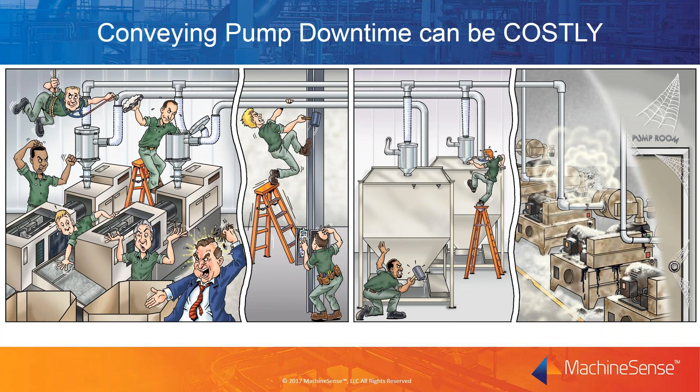This is a lighthearted look at a serious issue. Inadequate or inconsistent conveying performance can often lead to scenes like this, and the results are costly. First and foremost is unplanned and often hidden downtime in the form of starved machines, missed deliveries, lost profits, and angry bosses. It also leads to wasted time and lost productivity chasing conveying problems that can be difficult to diagnose and understand, but with help are very preventable.

At the heart of the conveying system is often a positive displacement pump. Often this vital piece of equipment is forgotten until it fails. Once the blower has failed, similar chaos ensues as maintenance personnel have to scramble to get the system back online. Today, we'll look at frequent causes of premature blower damage and some methods to identify and correct these conditions so you can prevent costly pump failures and unplanned downtime.

Jim, you want to start us off on this presentation? Sure, John, thanks. First, let's put a perspective on the cost of failure as it relates to vacuum conveying pump failure. The top graphic illustrates a typical positive displacement pump replacement unit. The replacement cost for a PD pump can range from maybe $2,000 up to about $5,000 or more, depending on the blower model. These costs are typical for pumps commonly used for vacuum conveying pellets and regrind through a plastics plant using tubes that are typically 2 to 4 inches in diameter.

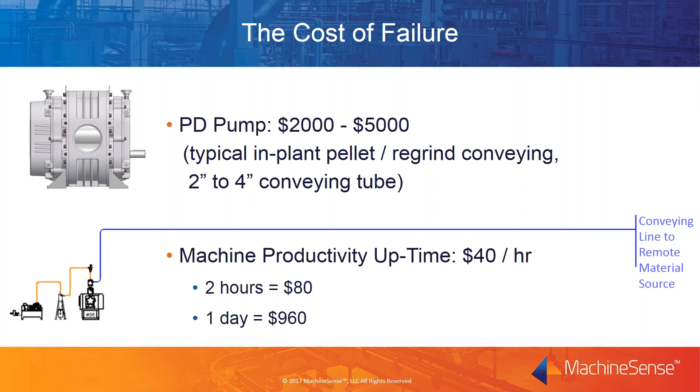But most vacuum conveying pumps are supplying resin to more than a single machine. It's not uncommon for a vacuum pump to service from 5 to 10 machines. In some cases, depending on the application, a pump can service 15 or more machines. With multiple machines relying on a single pump to supply resin, the math related to the cost of failure is multiplied and can change dramatically. The bottom graphic now shows a vacuum pump assembly pulling plastic resin from a number of remote material sources to 10 injection molding machines.

Multiplying the numbers in our example, if the replacement pump is in stock and repair is 2 hours, the machine downtime across the affected production cell now adds up to $800 plus the cost of the pump. If the pump's not in stock and it takes a day to repair, machine downtime now adds nearly $10,000 to the replacement pump cost. The net cost of failure across the 10 machines now ranges from about $3,000 all the way up to about $15,000 on the high side.

Customer impacts can also be significant. Machine downtime can lead to late shipments and potential penalties associated with missed contract commitments. Your reputation as a reliable supplier can be put at risk, which can also jeopardize future business. These are steep prices to pay for failure of a single pump. That's why they illustrate that a vacuum pump is really considered the heart of your resin supply system.

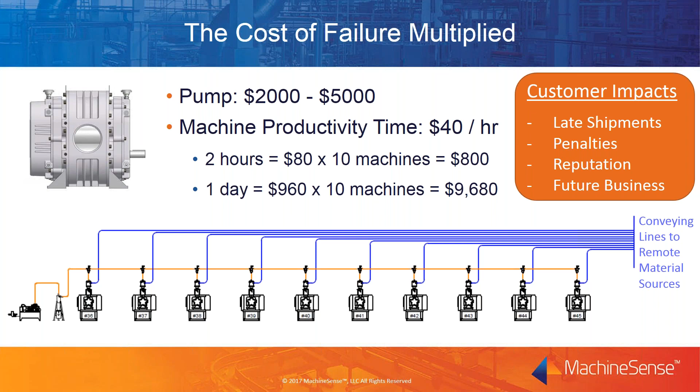While it's not often thought of in these terms, in reality, vacuum conveying of resin to process machines really can be considered a valuable plant-wide utility for plastics processors. And what do we mean by that? Well, as we just saw in the example, and like most other utilities in your facility, an interruption in resin flow caused by pump downtime often affects multiple processes. So from that perspective, resin flow is as critical to plastics processors as water, power, and compressed air.

Like power, arguably the most common utility, resin conveying principles are not necessarily intuitive, and symptoms are frequently misunderstood or even ignored. Resin conveying is more sensitive to system installation and setup than other utilities and requires more frequent maintenance. Redundancy is not widely implemented as a standard practice, so proper operation and maintenance is crucial to preventing downtime. As we illustrated in our example, resin supply interruption can quickly become costly when multiplied across production machines.

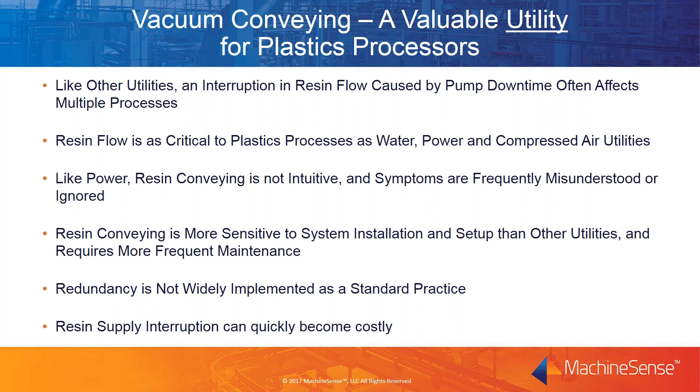Before we discuss common problems and the causes associated with conveying systems and vacuum pumps, it'll be helpful to understand some basic terminology. At the center of the graphic is a complete PD pump assembly. As the graphic illustrates below, air enters in through the top inlet on the top surface of the blower. You have two counter-rotating lobes in the center, and they take pockets of air that enters through that inlet and push them around the perimeter and push them through the outlet. Because the clearances are very, very tight, PD pumps are very efficient and capable of producing high vacuums. Coupled with the fact that these blowers are cost-effective compared to other technologies, they're commonly used and considered the workhorse in our industry.

The graphic to the left shows the gear side or the gear end of the pump. Hidden behind the gears are ball bearings. Both types of components rely on proper lubrication for a proper operating life. The other sump on the right side of the graphic shows the drive end. Once again, you have bearings that rely on proper lubrication, and the slinger fingers installed to circulate the oil. In this case, the drive shaft often sees heavy side loads created by the belt that typically drives the rotating pump.

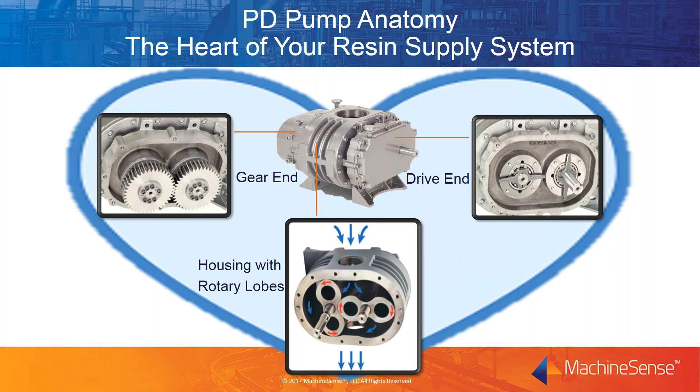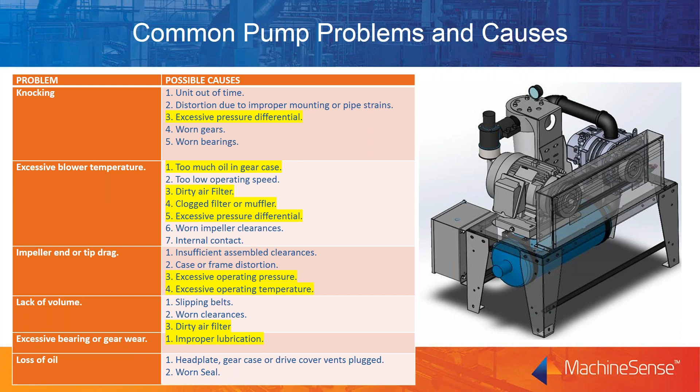Okay, so now that we know a bit about pump anatomy, we'll move ahead to common pump problems and their causes. This table summarizes common problems identified in a typical pump manufacturer's operation and maintenance manual. Some problems you may have observed in your own plant, like knocking or the sound of dragging inside of the pump, or you've seen loss of oil through seal leaks. These are tangible issues that you can see and you can hear. Other problems aren't so easy to identify, like excess temperature, lack of air volume, and excessive bearing or gear wear. Whether you can see these problems or whether they're invisible, the causes for these share a lot in common.

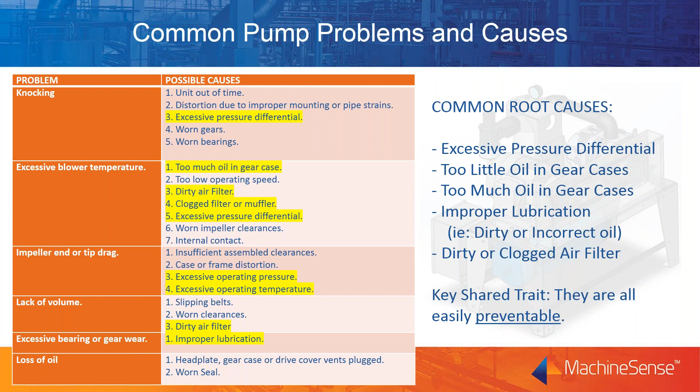These preventable root causes also share a common theme across the majority of industrial machinery. Surveys have shown over 50% of industrial breakdowns are due to improper lubrication. This includes under-lubrication, over-lubrication, and wrong lubrication, which means either the incorrect type or the lubrication failed. Lubrication and air filter issues, when combined, account for anywhere from 60 to 75% of machinery maintenance and repair for general industry. Once again, these problems are very preventable. We'll take a closer look at them in the slides that follow.

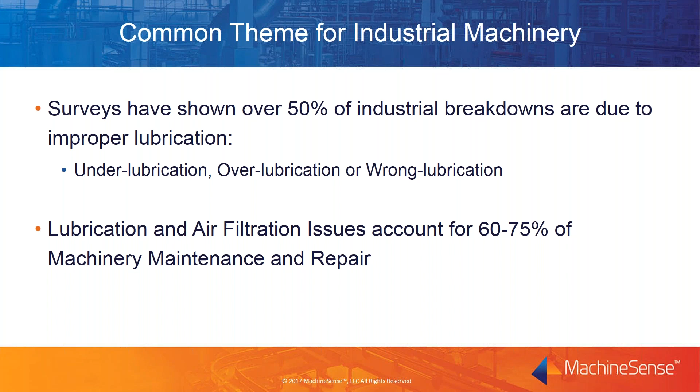Our initial focus will be on the lubrication issues. It may sound overly basic, but the first step is understanding the pump setup and proper lubrication.

The breathers are located on the top surface near the back of the photo. As the blower heats up, the breather allows the expanding air to vent rather than stressing seals. The fill ports are located on the top near the front of the blower in the photo. The left side is the drive side, the right side is the gear side. Each has a different capacity requirement for filling, so if you're pre-measuring the oil, be sure to verify both amounts.

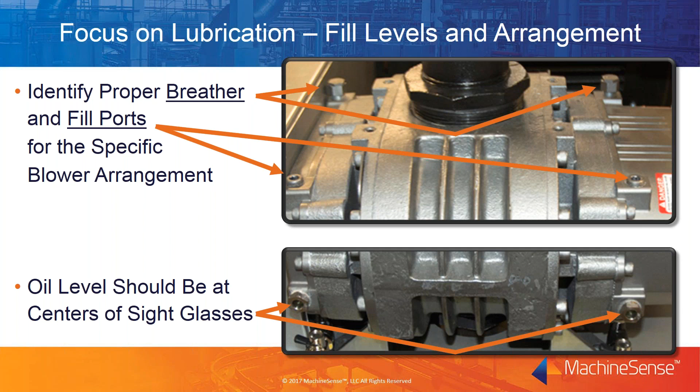Most pumps have oil sight glasses shown in the bottom photo. They allow you to fill the pump just by sight until the oil level reaches the center of that glass. When filling, it can take some time for the oil to find its level, so always pause briefly before checking the sight glass. Note the levels can only be checked when the pump is not operating.

The most obvious and often quickest lubrication issue to do damage is an underfilled oil situation. If the pump is started and run when the oil is low, it will generate heat and the pump will experience metal wear. This eventually leads to additional complications with metal contaminants. They accelerate wear and they compromise oil seals.

The damage to the gears can happen very, very quickly if the level is dangerously low. The gears wear and begin to fail, and you'll begin to hear a ticking sound or a knocking sound. That indicates the internal rotary lobes are clashing together due to backlash that's begun to affect the timing. End clearances can change, forcing the drive rotor into the end plates.

Underfilled oil will also cause the bearings to begin to fail. As shown in the bottom photo, the ball bearings are exposed and they rely on a consistent supply of oil to maintain the lubrication film that's sufficient to prevent metal-to-metal contact.

It's important to note pumps with damaged gears, bearings, or seals can be rebuilt, but only if the damage is caught early. The key is recognizing the problems before damage is done to the blower housing and to the blower lobes.

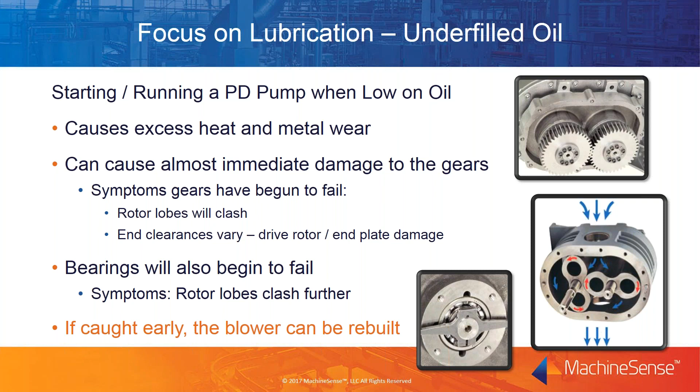A not so obvious lubrication issue, but still capable of doing damage, is an overfilled oil condition. Excessive operating temperature can occur when the pump is started and run with too much oil because the heat can't be dissipated effectively. This causes abnormal stress and wear of gears, bearings, and seals. This can cause surprisingly quick failure in extreme conditions.

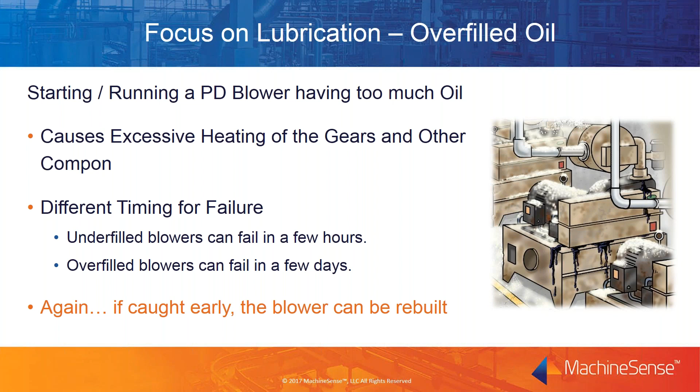A pump manufacturer explained it to me this way. Operating a pump with a near empty oil reservoir can lead to failure within a few hours or even less. But running a pump with a sump that's filled to the top can lead to failure in as little as several days. Once again, if the problems are caught early, before damage occurs to the pump's major components, it can be rebuilt.

The final focus when it comes to lubrication relates to the type and maintenance of oil you use. PD pumps require industrial gear lubricant, not automotive oil. Check the pump manufacturer's recommendations for viscosity, additional requirements or restrictions for additives, seal compatibility requirements, and other enhanced properties that are designed to protect your pump.

Synthetic oil is recommended because of the high heat of compression and temperatures in vacuum conveying. The maintenance interval for your oil depends on the operating temperature. The graph to the right shows synthetic oil operating life decreasing sharply as the pump air exhaust temperature rises above 220 degrees. Depending on application and so forth, PD pumps can operate commonly between 220 and 250 degrees Fahrenheit when fully loaded.

So it's important to understand those operating conditions when you try to evaluate your pump's change cycle. Finally, as with other lubrication issues, and for many of the same reasons, using the wrong oil or oil that's failed from thermal breakdown or contamination will damage gears, bearings, and seals over time.

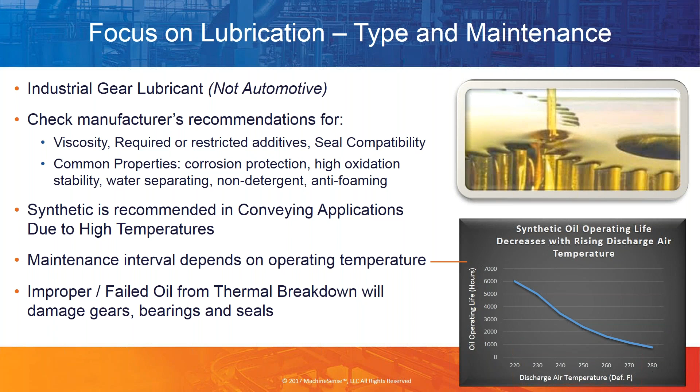So let's change our focus to air filtration, the other very common problem with industrial machinery. Operating a pump with poorly maintained filters can cause excessive operating temperatures. The elevated temperatures result from increased vacuum levels or starving air, which leads to a lack of cooling. The common theme is accelerated oil failure and gear and bearing damage. It can also cause discoloration of the pump exterior paint.

Clogged or damaged filters can lead to fines being pulled through the filter media and into the pump. Inside the pump, the high temperatures will melt the fines and cause them to accumulate on the housing and on the rotary lobes. In extreme cases, the residue can score or gall interior surfaces or even cause the pump to seize. The final problem with poor filter maintenance is reduced and inconsistent conveying performance.

The added vacuum load can reduce the pump's ability to lift and carry material through the line, causing intermittent slugging, line plugs, and reduced throughput. These conveying problems can lead to downtime, missed part quotas, scrap parts, and other hidden costs.

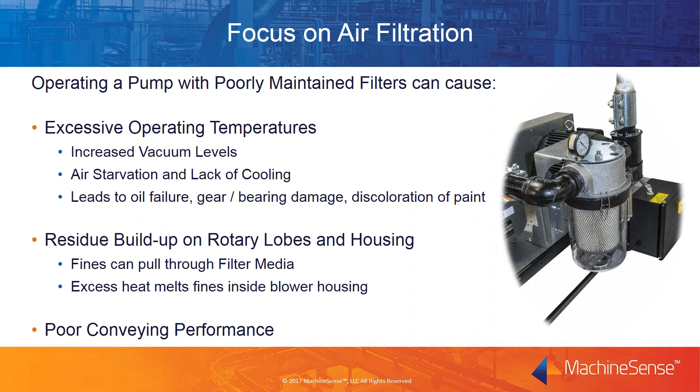Before we finish up with the problems, we're going to focus a little bit on system operating conditions. Operating the system in an over vacuum condition, as we just mentioned, creates unstable conveying conditions and can reduce conveying rates, and that creates excess heat and all of its related problems with the blower. It can also cause rotary lobe damage either by hitting the housing or through interlobe contact.

High ambient or high inlet temperatures also stress the blower. These can be the result of conveying heated materials or from inadequate ventilation near and around the pump.

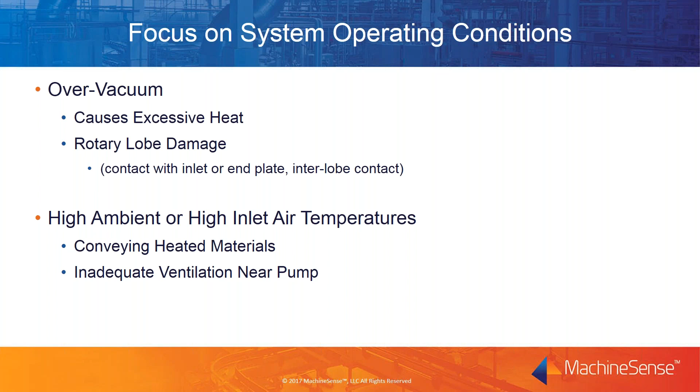It's important to remember that you can prevent over vacuum conditions relatively easily. Always use an adjustable pickup device at your material source. When high vacuum occurs regularly, adjust this pickup to allow more air and less material into the conveying line.

Most receivers include a filter screen to separate material from the conveying air. When problems seem to be intermittent with vacuum, check related receiver screens for plugging.

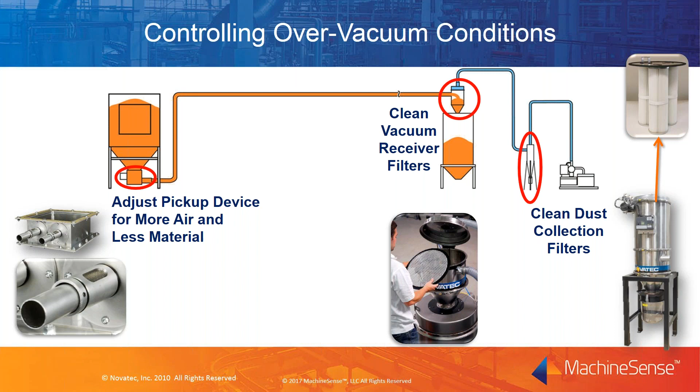Finally, most conveying systems have a central dust collector to separate the majority of the fines before they reach the pump. It's normal for their internal filters to accumulate dust over time, and they will require cleaning to maintain normal conveying system performance.

Okay Jim, it's time to see if we have any questions. And while we're waiting for questions, a couple of things dawned on me.

I know you covered costs related to pump downtime, but it seems to me that there's also a problem with the material that's in process, in the machines waiting to be processed. And when processing stopped, the packaging of the final product also stops. So there are costs from the beginning to the end of the line, not just with the pump.

Yeah, absolutely. So you would kind of consider those to be part of the machine uptime or productivity number. And again, depending on the end product and the process involved, it can range dramatically. We used $48 an hour, but as I said, it can be lower, it can be much higher.

Yeah, and also as far as catching pump damage early, just by hearing a noise, I would think that's pretty difficult due to the noise from other pumps and machinery. So I guess we're going to talk about how to get around that in the future here. Yep, we will, absolutely. Okay, I'm not really seeing any questions yet, so let's move on with the next section of the presentation.

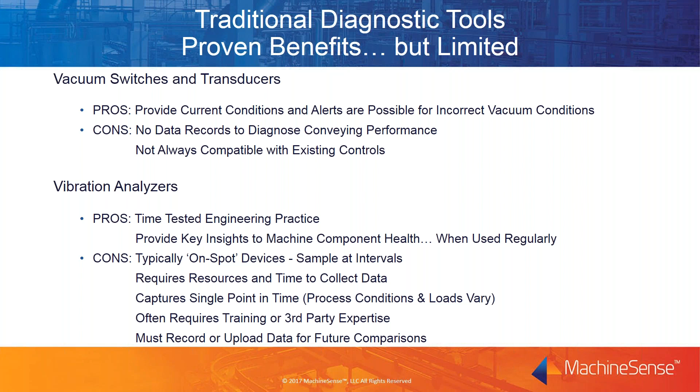Technology is reshaping our ability to monitor and analyze. The industrial Internet of Things has allowed sensor data to become more accessible. Data analytics are becoming more advanced, and historical trends are automatically captured. 24/7 machine monitoring is possible.

It captures varying conditions for improved analytic results. It is easy to access and understand results via app or web page. Automated reporting via email or SMS text messages are included, simplifying information feedback to the people who need it most.

MachineSense Vacuum Pump Analyzer takes advantage of these Internet of Things benefits. This is achieved by continuous machine monitoring and provides prospective feedback and helps with root cause analysis, trending and early detection of component deterioration, even under changing loads. Again, as I mentioned, really critical for helping to understand the equipment through time.

Wireless data hubs included, which allows for wireless connection to your sensors and to your internet. Pump component analyzer is an easy and powerful magnetic mount sensor. It measures vibration and ambient operating conditions. A vacuum sensor with built-in power supply is also included. Therefore, it does not require any maintenance or battery replacement, typical with other types of sensors.

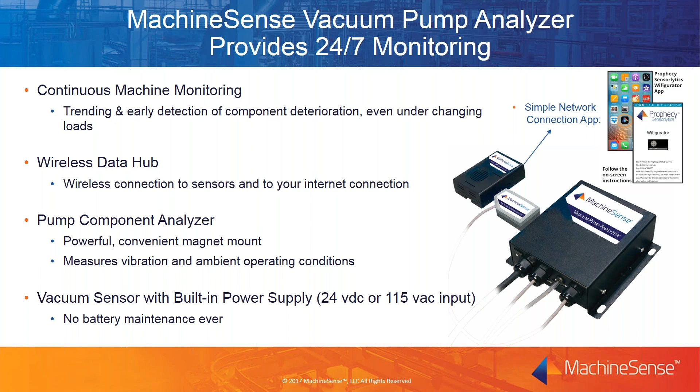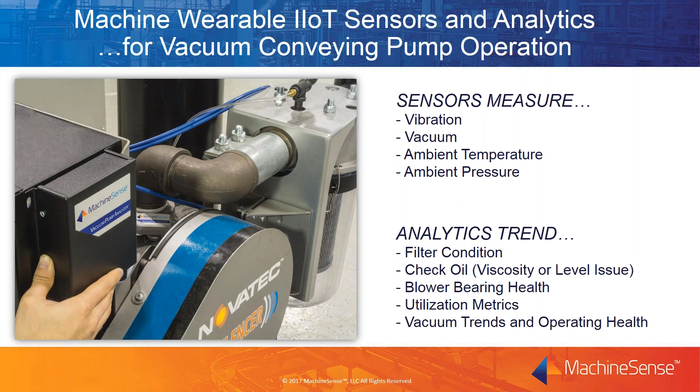These sensors measure temperatures, vibration, vacuum, ambient temperature, and ambient pressures. These are all critical in understanding and getting a true representation of the equipment and its conditions. Combined with analytics, they determine filter condition. We have check oil analytics that tell you if your oil level is low or your viscosity is low. Blower bearing health, vacuum trends, and operating health—all of these trends and metrics help understand proper utilization of your pump in your system.

The sensor, a vacuum pump analyzer, works like this. The sensor data transmits wirelessly to a data hub. It is then sent through a customer-supplied network router to cloud-based servers running powerful analytics software.

This is the Crystal Ball software. MachineSense's patent-pending analytic algorithms track and compare the collected data against an established baseline to determine overall pump or blower health, and alert you to changes in performance, allowing you to accurately diagnose problems before they happen. Our easy-to-use Crystal Ball condition monitoring software is accessible through a web browser and easy-to-navigate mobile app, allowing you to view real-time machine conditions anytime, anywhere, from any desktop, computer, laptop, tablet, or phone with an internet connection.

Valuable operating metrics are delivered through easy-to-understand dashboards and trend lines. If a machine or component reaches a yellow warning state, actionable maintenance advice is delivered to assigned technicians via email or text messages in advance of machine or component failure.

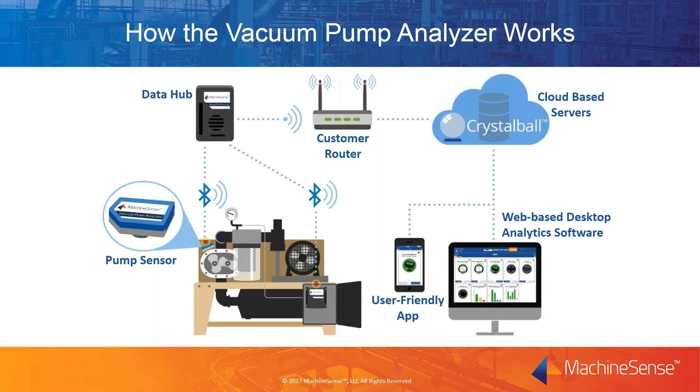It's super simple to install right out of the box. First, check the belts, air filter, and oil to ensure normal operating conditions of your pump, and adjust if needed. Second, install the sensors on the pump itself. Third, install the data hub within 15 feet of the pump and plug it into the 115-volt outlet. Fourth, we establish a network connection via wired Ethernet or Wi-Fi using the Wi-Figurator app. Now you'll be ready to access the vacuum pump analyzer through Crystal Ball, the machine monitoring website.

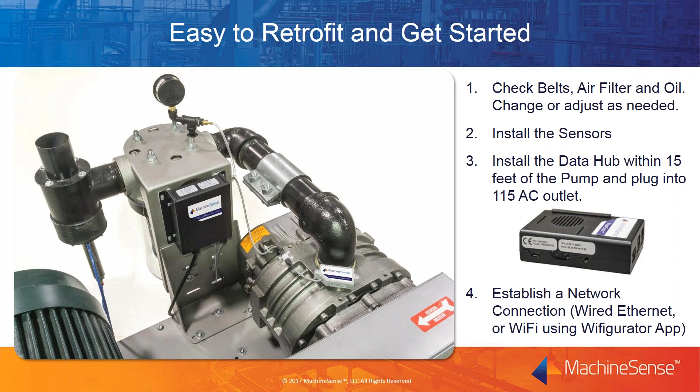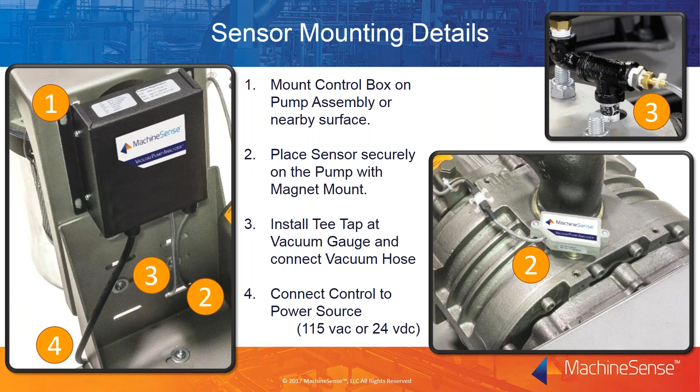Some more details on the sensor mounting. It's quite simple and straightforward. Mount the control box on the pump assembly or a nearby surface. Step 2: place the sensor securely on the pump with the magnetic mount. Step 3: install a T-tap on the vacuum gauge and connect a vacuum hose. Step 4: connect the control to the appropriate power source, typically from the pump control itself. It comes in 115 or 24-volt DC to help facilitate that.

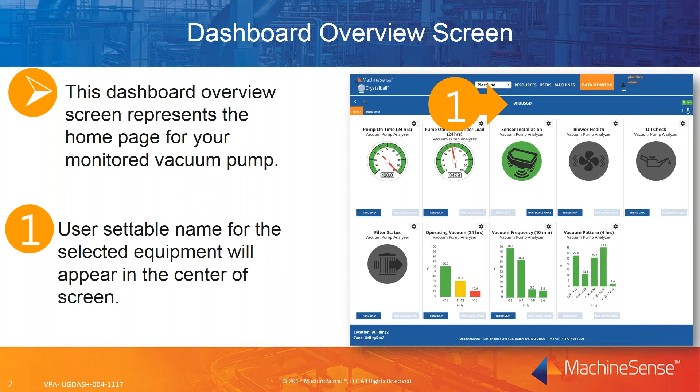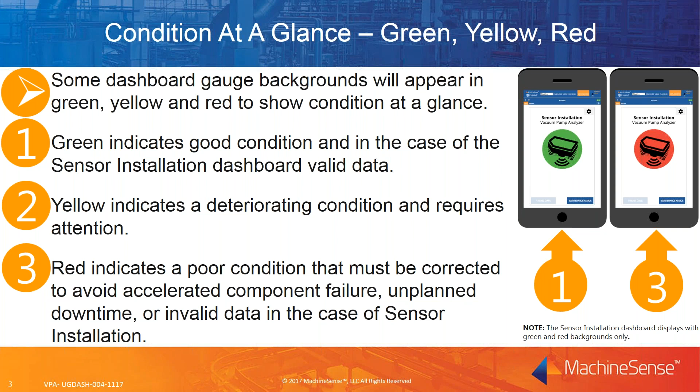So we were just talking about the sensor installation. As you can see here, it shows that the sensor is mounted properly. You're getting enough vibration. Our analytics ensure that a sufficient location and mounting have been made, and you'll see that with the green gauge. If not, it'll be red and you'll have to remount.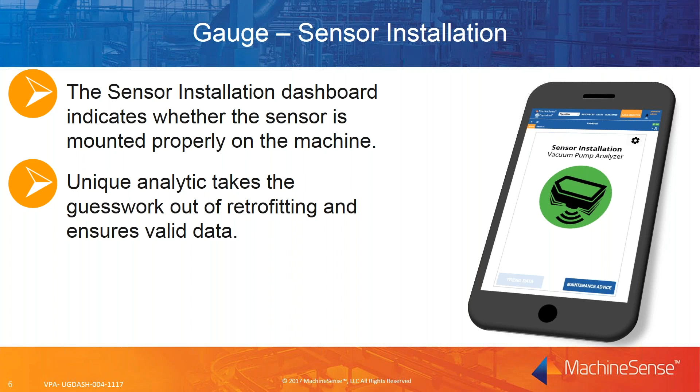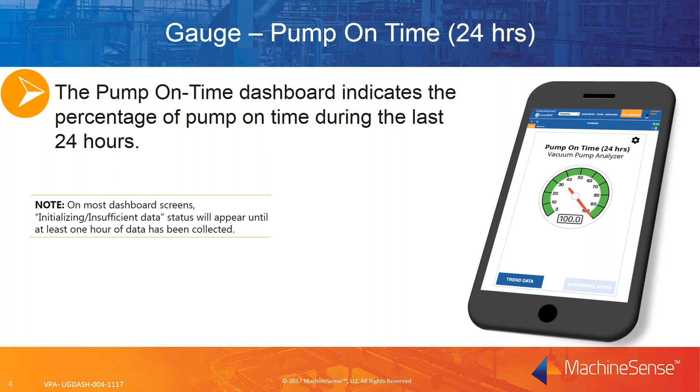The pump on-time is a 24-hour gauge that gives a good indication of how much the pump is running during the last 24 hours. The pump utilization under load is also a gauge for the last 24 hours. This gives us an indication of how much pump capacity is being used on your system, how often the pump is running and doing work.

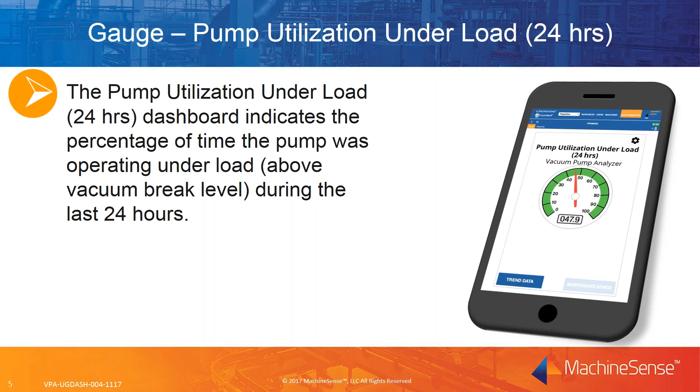The blower health dashboard is the heart of the machine. That's showing us our blower's health condition, particularly relating to the drive bearing and rotational balance, with trending over time.

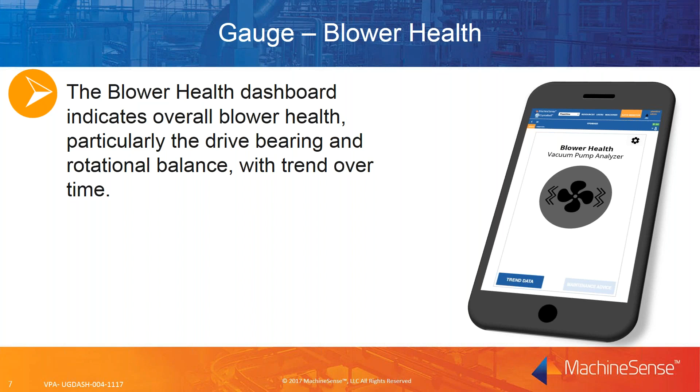The oil check dashboard indicates the condition of the oil—low level or poor viscosity—and of course helping prevent the pump from operating in these conditions is crucial to extended life.

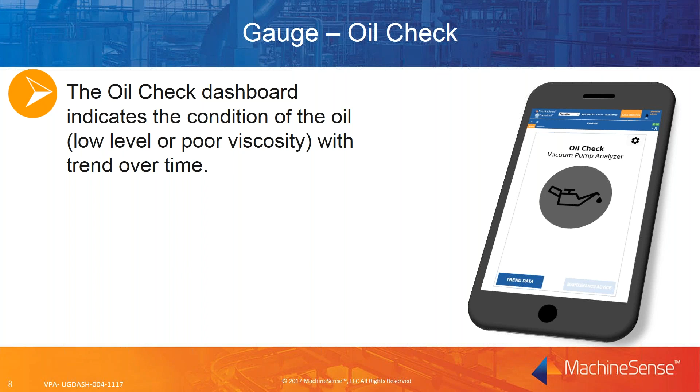The filter status dashboard indicates the condition of the filter with trending over time.

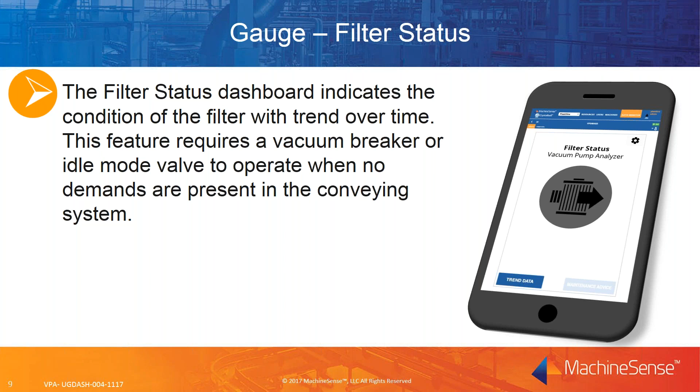The vacuum breaker valve creates an idle mode, during which the pump is operating at a no-load vacuum level. Therefore, the vacuum level in the system is an indication of the amount of vacuum being lost across the filter, and gives us a very good indication of the filter condition and its status.

The operating vacuum 24-hour gauge is one of the most important gauges. It gives us a real good overall system health and how it is operating.

Obviously, operations in the red zone need to be corrected immediately and can result in immediate and premature failure of the blower. Operating in the yellow should be avoided and can be an indication of over-vacuuming the pump blower system and issues with setup of the vacuum system. Everything should be in the green.

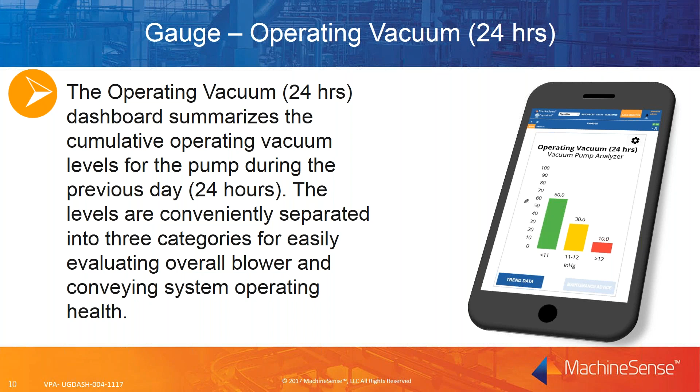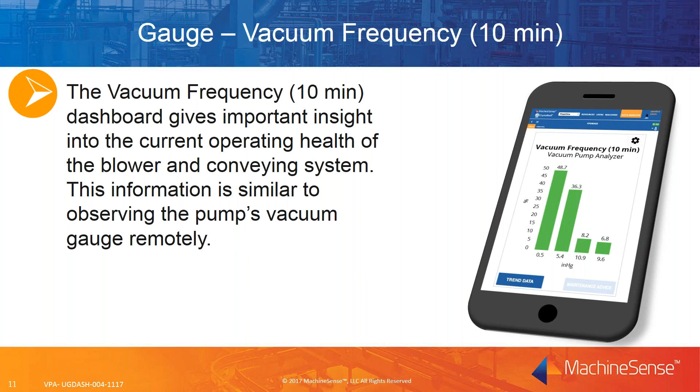The gauge for vacuum frequency is a 10-minute gauge, and this is more like a real-time gauge. It's like seeing the local vacuum gauge on the pump remotely. It gives us the ability to see this remotely and get an indication of how that pump is currently running.

The vacuum pattern gauge is a 4-hour gauge. This gives you important insight on how the pump and the conveying system is operating during this time.

Shifts in these patterns can provide an early indication of changing conveying conditions, especially with material supply issues like plugged lines, vacuum leaks, or clogged filters, which can also be indicated by this.

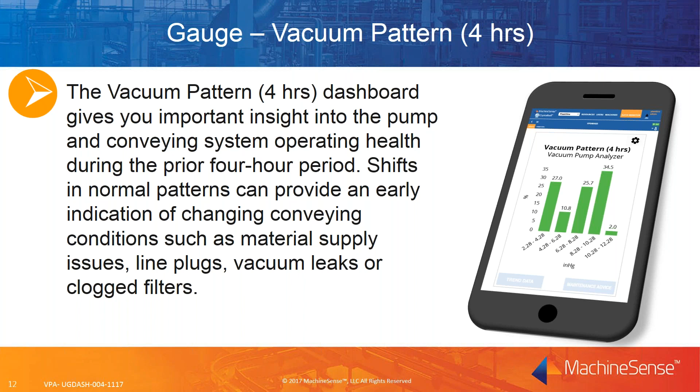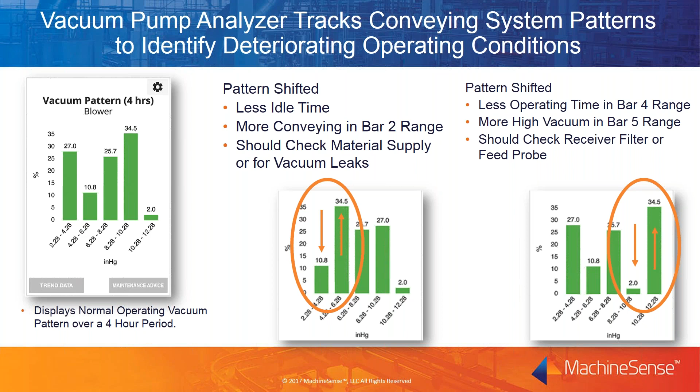So you can see how these three patterns were able to help diagnose your system conditions through these changes in patterns.

One of the nice things about the vacuum pump analyzer is its trend data and maintenance advice. This is your expert. The analytics included with this system can provide maintenance advice.

Whenever you're in yellow or red conditions, it provides easy, understandable, actionable maintenance procedures and steps to help prevent failure and extend your machine life.

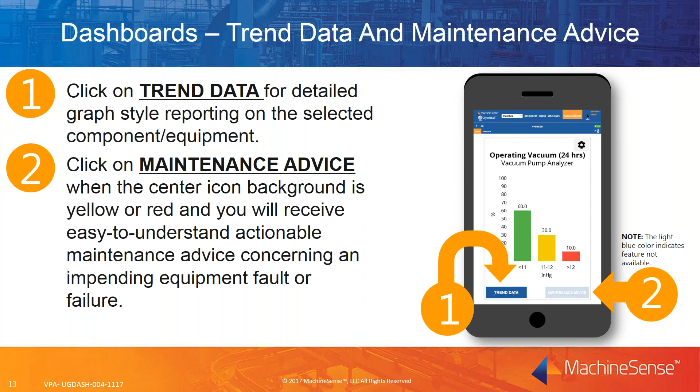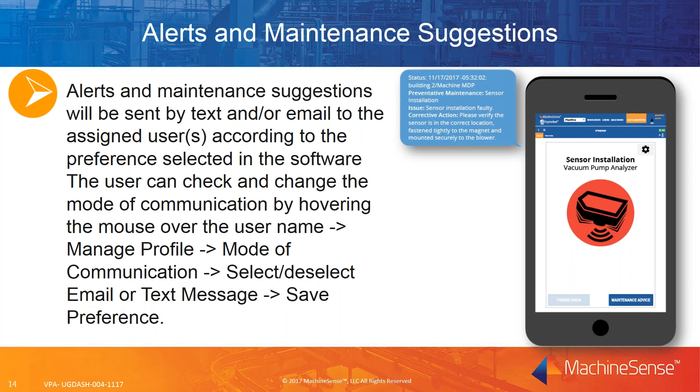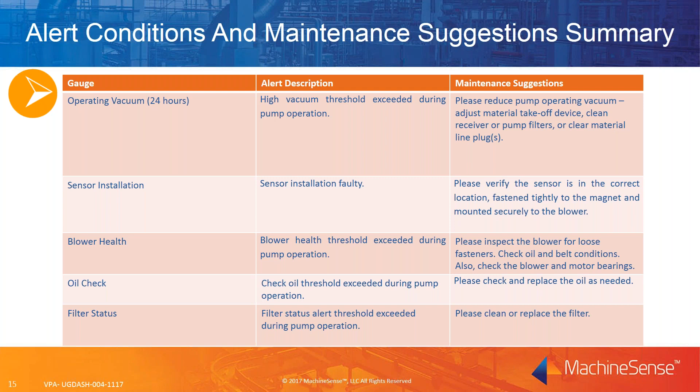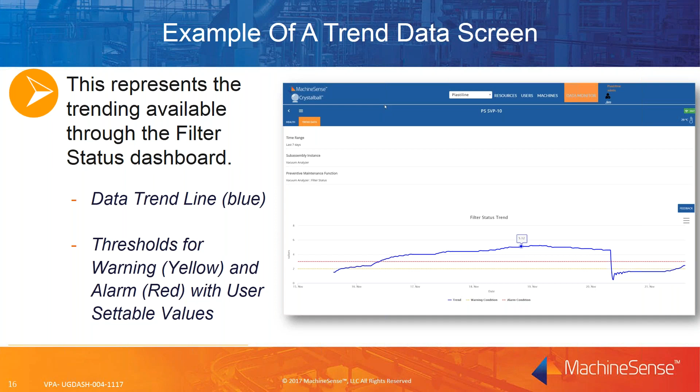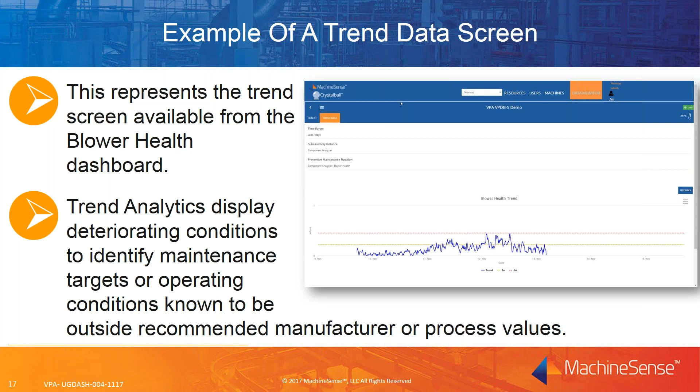Thanks, Fred. Before we finish up, I'm going to circle back to the start. We've seen vacuum pumps are vital to plastics manufacturing processes. When they stop, material stops, parts production stops, and money stops.

We've identified key vacuum pump problems and system operating conditions that lead to premature damage and unplanned or hidden downtime. The vacuum pump analyzer provides a new, powerful tool to help processors get the most out of their vacuum pump and their conveying system. With it, you can identify deteriorating conditions as they happen with continuous 24/7 monitoring.

You get real-time maintenance alerts sent via email and text. You can perform maintenance based on actual machine condition. It's easy to use, easy to understand, and no specialized training or expertise is needed. Best of all, it will help you avoid unplanned failure and downtime on vacuum conveying pumps.

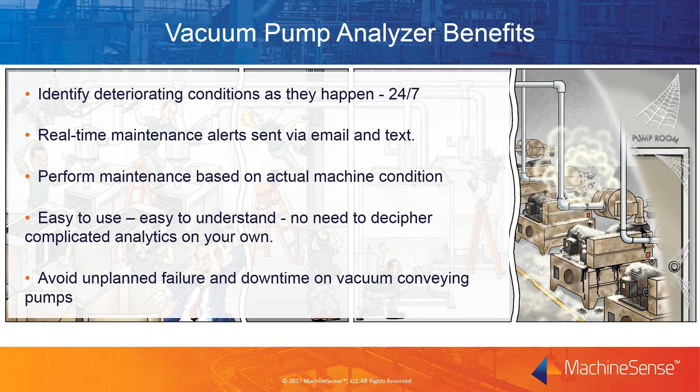This sounds pretty exciting in that it sounds like this is the first time there's been a 24/7, 365 way of monitoring the condition of vacuum pumps for a variety of conditions. Is that true, Jim? It is, John. One of the reasons we can do it is it usually takes a tremendous amount of data to do that, and it's typically not practical to store and transfer that data. But with some patented and patent-pending analytic and sampling techniques, we can normalize the data over time and provide real-time analysis of up-to-date machine condition.

Okay, one of the questions we have here is how many sensors can be on a typical system, and can sensors be added at a later time if needed? Yes, absolutely. There's really no limit to the number of sensors. It's all governed by the number of devices you have to monitor. We simply have to make sure we have enough data hubs to collect the data and transfer it to our servers.